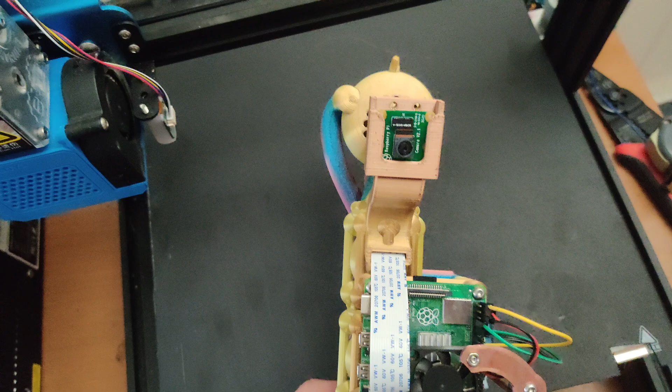Hey, do you want to make this sweet eyeball on a stick Octoprint mount? Well, if so, then good news, because I'm going to show you how.

And if not, then I don't even know why you're here. I mean, did you not read the title to the video? This one's totally on you, dude.

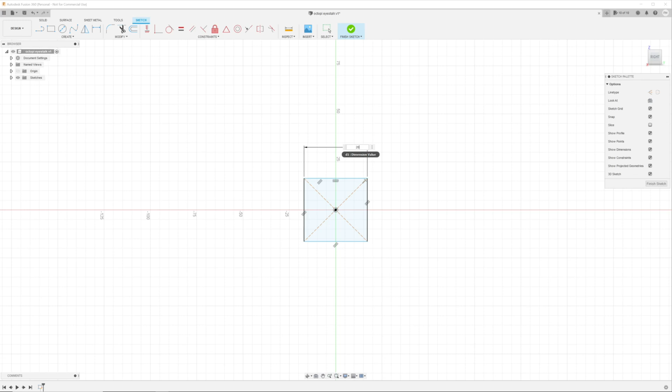First thing we're going to build is the part that clamps onto the printer. Sketch out the cross section of the part of your printer that you're planning to attach this to. I'm planning to mount mine to the top rail of my printer, so I sketched that out in Fusion 360.

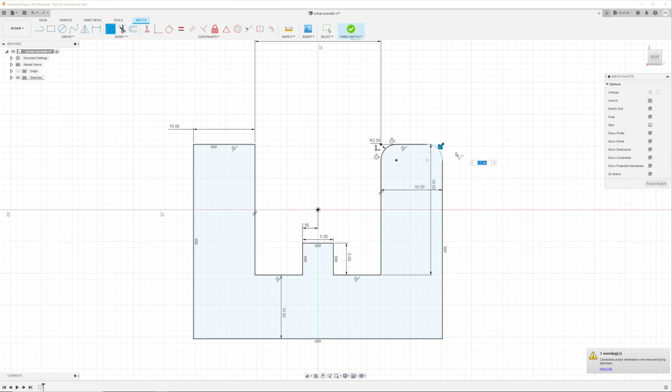Once you got your cross section, sketch a rectangle around 3 of its sides to represent the plastic, and then set the thickness to whatever you're comfortable with. I'm also adding a little tab in the middle just for stability. Round out the edges, and once you're happy with how it looks, extrude it out to whatever width you want.

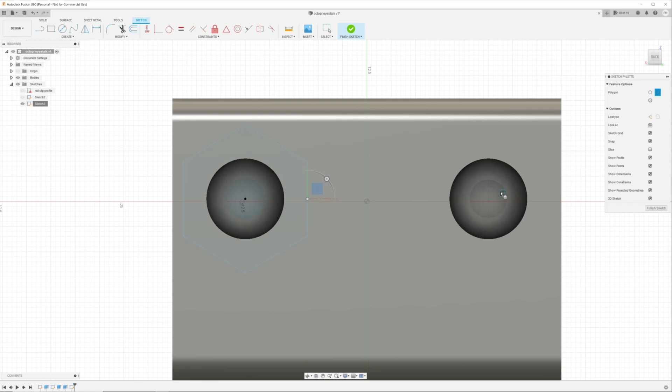Next, we're going to make a way to secure this to the printer. I'm planning to install mine so that it's stretching out forward from the top of my printer, which means that gravity is not going to be on my side for this one. My plan is to use a couple machine screws to keep it in place, so I create a couple of holes for that. I also cut a couple slots to hold hex nuts to give those screws something to grip onto.

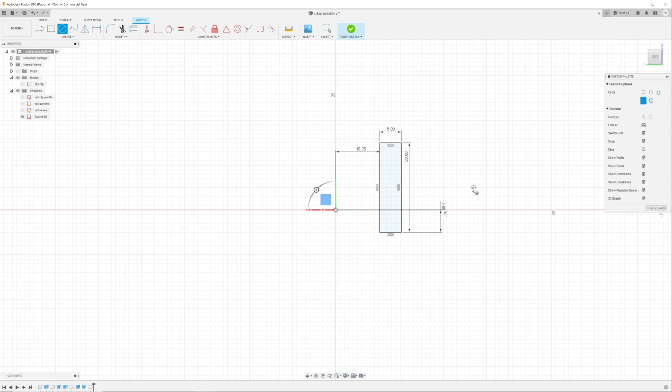Now that we have a way to attach it, it's time to build our piece. I'm envisioning a small cylinder full of tightly packed tubes twisted into a spiral that the rest of the piece will attach to, so we'll start by building that. I begin by sketching a cross-section of the cylinder's lid.

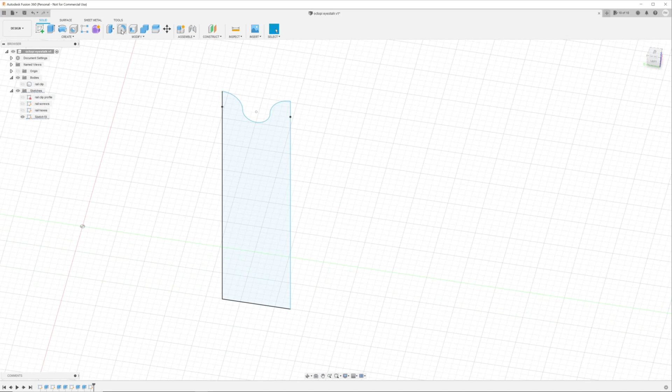I don't really want anything too fancy here, but I do want something with a little bit more detail than just a flat edge. I'm also drawing the cross-section so that it begins on the inside of our rail clip from earlier, which is fine so long as I make that side completely flat. Once I have the shape I want, I revolve it out to make the lid.

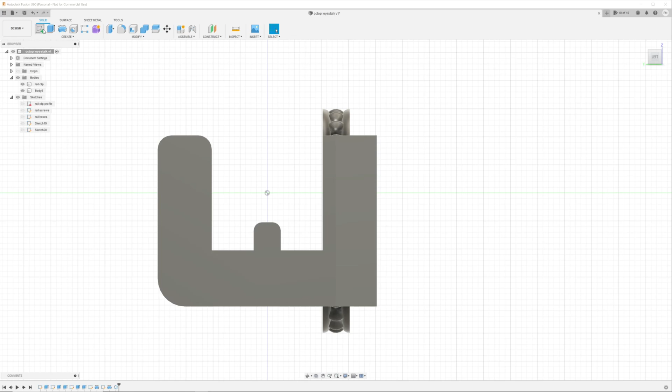I'm happy with the overall shape of the lid, but I'd like to add a little bit more detail to it. I sketch a circle with a line cutting it in half along the edge, and then I revolve that out into an orb. I then take that orb and I form a circular pattern around the lid. Now that I'm happy with how the lid looks, I use the Move/Copy tool to create a copy of it to serve as the opposite lid.

Now that we have our lids, let's make the tubes. I start by sketching out the first tube on the inside of one of the lids. Then I create a circular pattern to copy it all around. Then I use the scissors tool to cut away the intersections, leaving only the outside. Note that you can actually click and drag to cut multiple lines.

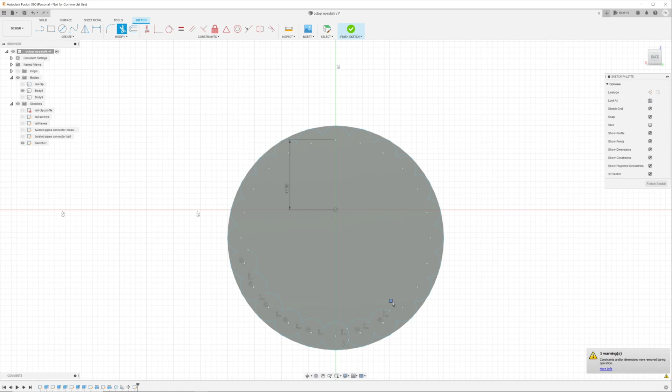I want these twisted into a spiral, so I'm going to create a sweep, which allows me to add a twist. In order to do this, I need to draw a line to represent the path we're going to sweep the shape that we just made along.

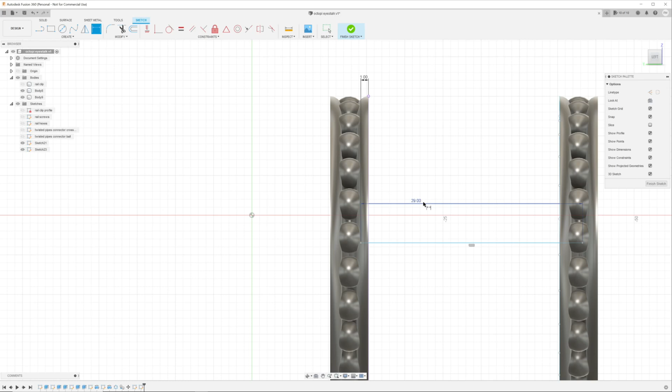This might actually be the stupid way to do it, by the way, because I just picked up the software like a week ago and I'm still figuring it out. So yeah, if I am doing this a stupid way and you know better, then I guess go ahead and dunk on me in the comments or whatever.

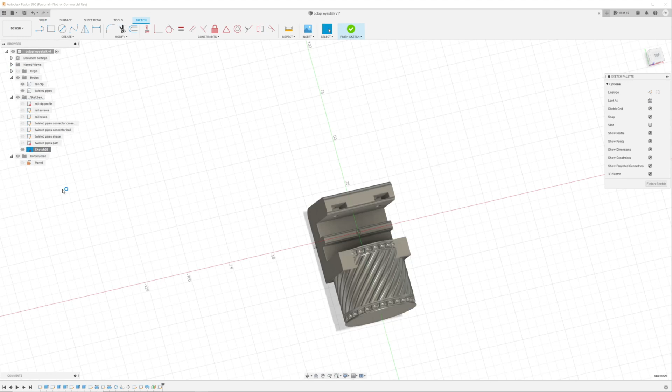Once we have our shape and our path, create the sweep and play around with a twist angle until you're happy. It's going to be easier to build the rest of this piece if we know where the eyeball is, so let's build that real quick. Create a plane a little bit off the ground, and then draw a circle with a line going through it. Revolve it out, and that's going to be the rough shape of our eyeball, though we'll add more detail to it later.

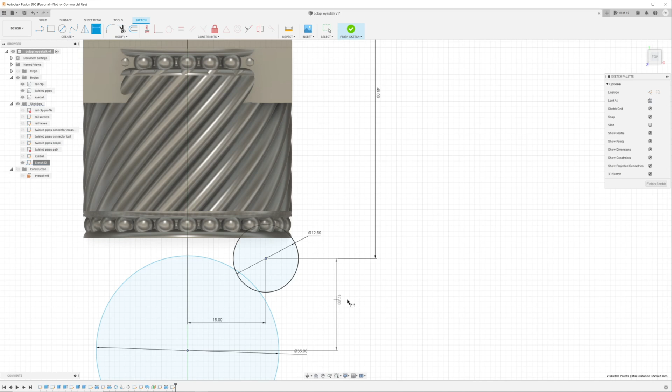I'm picturing a bunch of orb-filled segments connecting to the eyeball, so I create a new sketch and I draw out what I'll need. A couple small orbs that I'll use to create rings at the beginning and the end of this, and a larger orb that's going to go in the middle. I then impale them with lines so I'll be able to revolve them out later. I'm also going to want something to divide up the segments, so I sketch out a cross-section of that while I'm here.

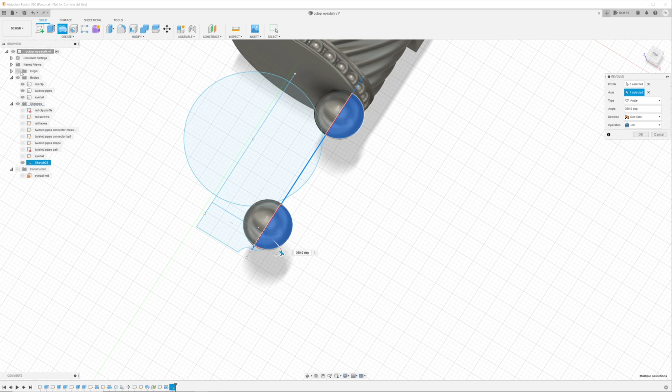I revolve the smaller orbs out first. I want a bar to connect these together, so I create a plane, sketch a circle, and then extrude it forward. I then create a circular pattern to create those rings I was talking about. And then I revolve out the remaining circle to make the big orb that'll go in the middle.

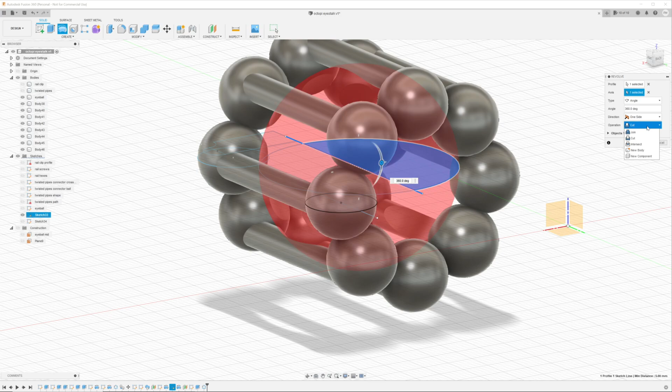And then I revolve out the end cap. Just like before though, it looks a little bit dull, so I do want to add a little bit more detail now. This time I'm going to go with these little circular tab thingies.

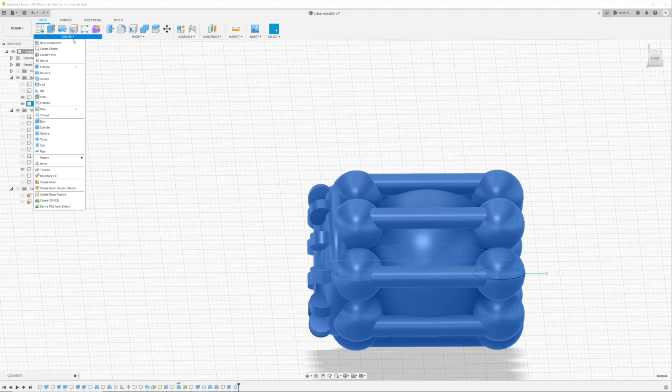Now that we have our segment, I create a rectangular pattern, set the spacing the way I want, and create clones until it's close to, but not quite touching the eyeball. We'll finish connecting those orb segments to the eyeball in a bit, but first I want to take a little detour and build a tube that will wrap around the connectors and plug directly into the eye.

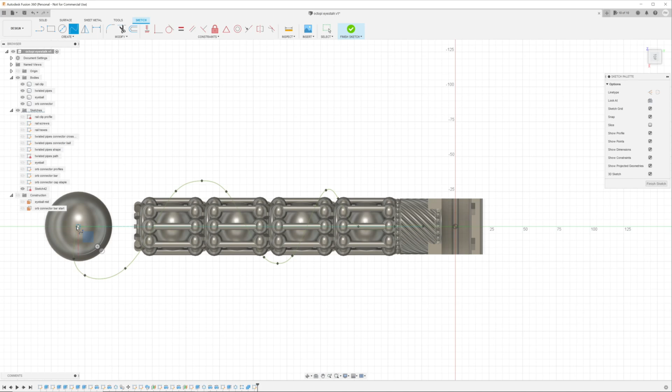I'd start by taking my spline tool and sketching a path that snakes across my piece a couple times. I then tilt the camera and pull the individual points up and down in order to make something that looks loosely like a spiral. I want this to look as if it's been haphazardly wrapped around the piece a few times. I also kind of want to avoid any overhangs that my printer might be unable to handle.

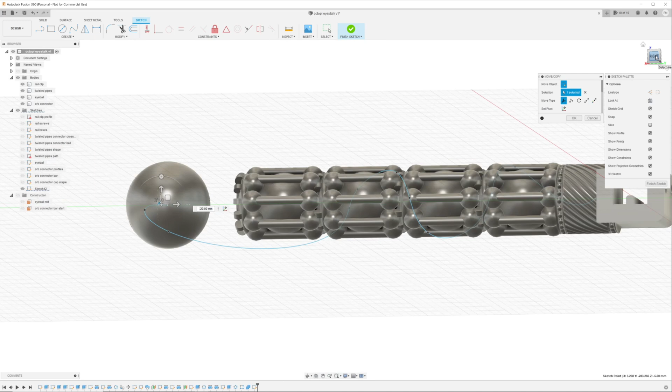Then I sketch a circle to represent the cross-section of the tube, and then I sweep the whole thing out. Mine didn't work the first time because I had a bend that was a little too tight, but after tweaking it a bit, it eventually did.

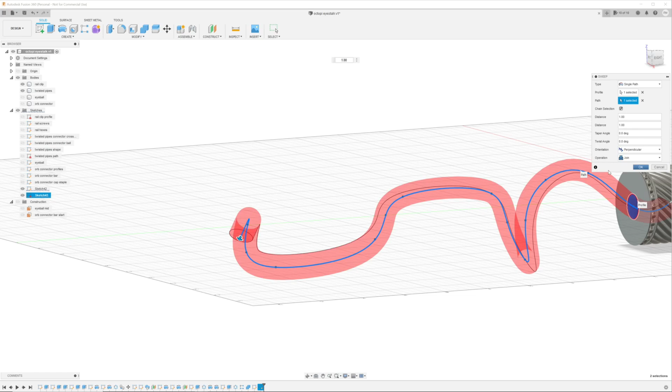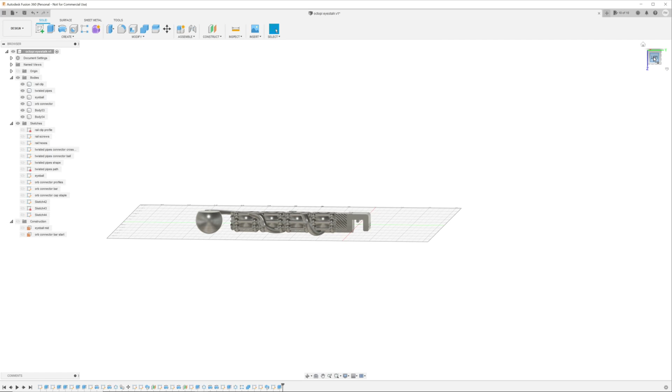Once this tube exists, I make a few adjustments just to prevent any problems I might have when printing it. I'm mostly concerned with parts where it's going up or down. When it does that, I want to make sure that it's doing it very quickly without a bunch of horizontal movement. I slice away the bottom of this just to see how it's going to look when it's printed, and then I make a few more adjustments based on that.

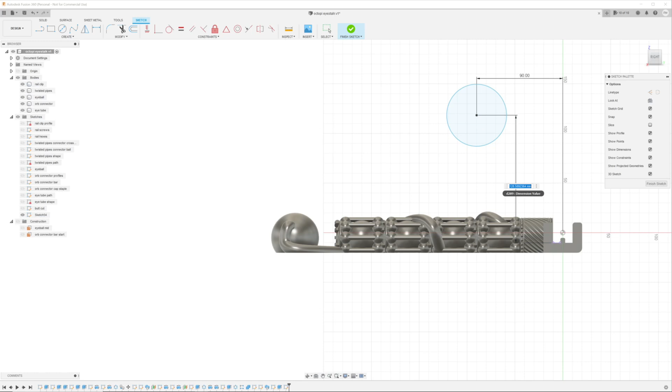Alright, so now I want to connect the eyeball to the stick with a hook, but first I have to figure out which way the eye is looking, as that's going to influence the angle that I impale it through. To do that, I take some measurements of my printer in real life to find out how far away the center of my print bed is from where I'm going to attach this, and then I sketch a circle in Fusion at that location. Once I have my target in the software, I draw a line connecting it to the eyeball, and this is going to be the angle that I want the eye facing.

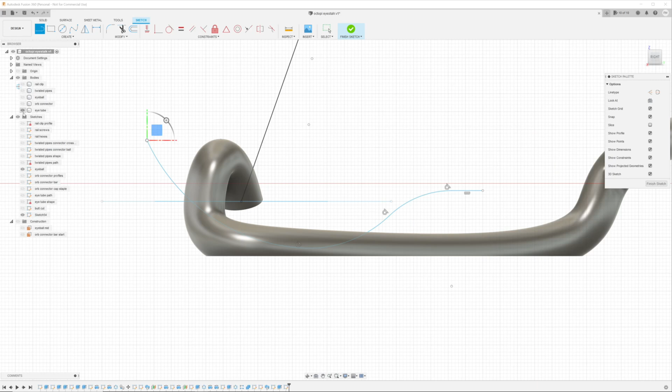Now that I know which way the eye is looking, I sketch a path the hook will take so that it goes in roughly perpendicular. Next, I sketch out a polygon for my cross section. I'm planning to twist this into a spiral, so I want something with edges so that it'll show the twist. Now that we have our shape and our path, we create the sweep and play with the twist and the taper angles until it looks right.

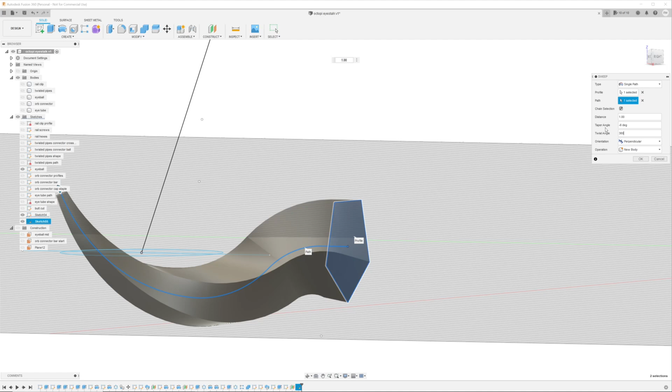I've been calling this thing an eyeball, but so far it's just a blank sphere. Let's add some detail to it. We'll start by creating a plane along a path and then using the line of sight we created earlier as the path and placing the plane just a little bit off the eyeball.

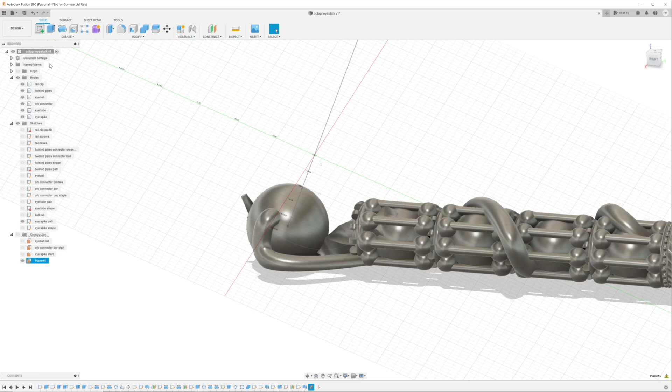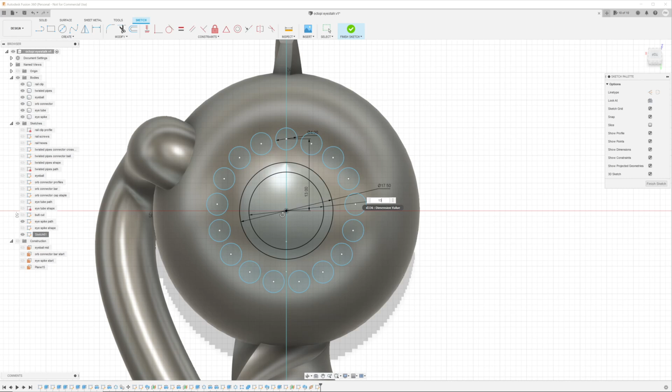Now that we have our plane, let's define our pupil. I'm envisioning a ring of round holes for the outside, so I sketch that. I also want a ring inside of those holes, so I sketch that as well. Finally, I sketch a pentagon in the middle and extrude the whole thing slightly into the eyeball to create the pupil.

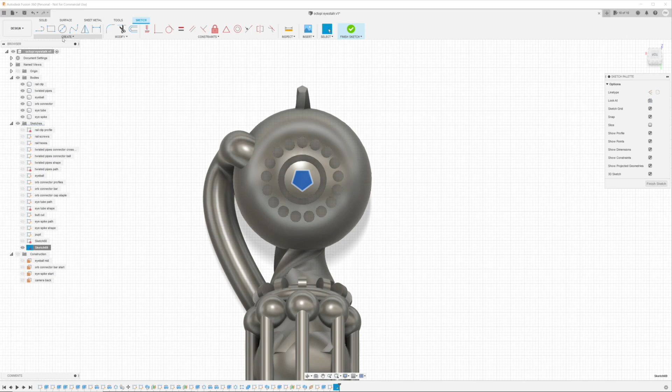Now it's time to build our camera mount. I start by sketching out the back of it on the same plane that I used to draw the pupil. Now we're going to sketch a square inside the eyeball itself on the plane that was created when we extruded the pupil into it. And now we're just going to use that square to create a sweep using the line of sight that we created earlier, but we're going to scale it back so it doesn't quite reach the camera mount. We're also going to give it a pretty heavy twist.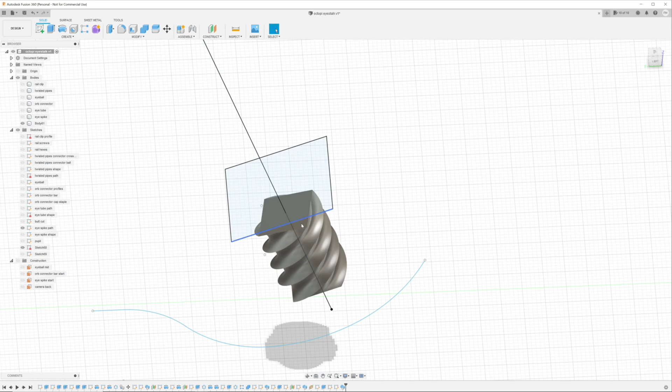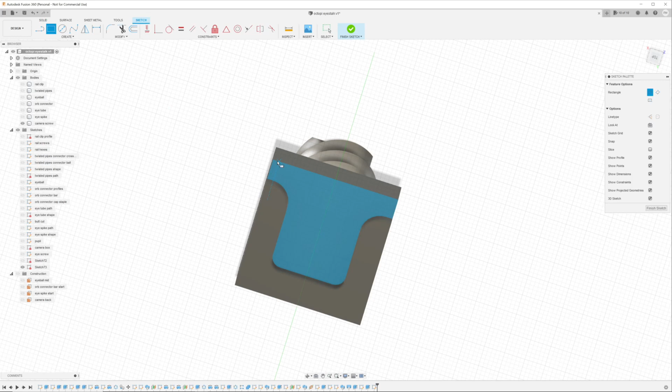And now we're just going to connect the top of the sweep that we just made to the square representing the camera box with a loft. Alright, so now we're going to make a place for the camera itself to live. Let's begin by sketching out an opening on the front of the camera box to let the lens through, and then once we're happy with it, we'll just extrude it slightly into the box. Then we're going to cut a square with the actual dimensions of the camera to make the slot that the camera itself will go into.

And finally, I'm going to punch a couple holes in the top, and what I'm doing here is just giving myself a lazy way to secure the camera in place. So if the camera is slipping around on me, I can just grab a piece of PLA filament and kind of jam it in there, and that should hold it.

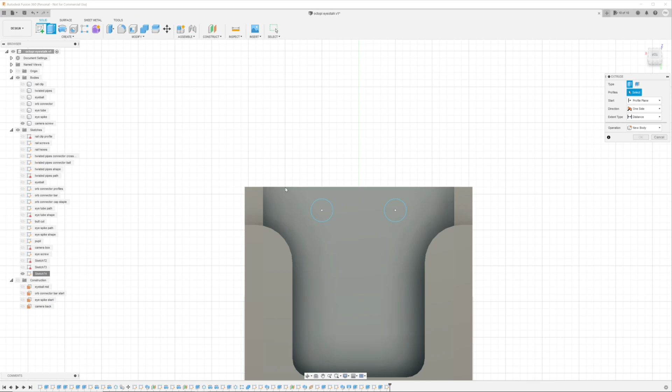Next, I want to build a little channel for the ribbon cable. You don't technically need to do this, and it would actually be a lot easier to just cut a hole in the bottom of the camera box, if I'm honest. And in many ways, this channel is actually going to make things more difficult, as you're going to need to get the cable through the channel, which might even require a longer cable.

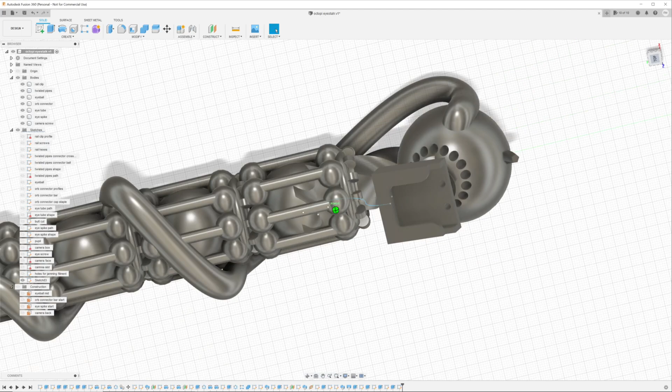But the advantage of creating this channel is that it gives you an opportunity to actually shame the ribbon cable. Ribbon cables, by the way, are huge pieces of garbage, you know. Most cables can actually bend in any direction that they want, but not ribbon cables. I think they're too good for that, so they won't bend on an entire axis for just like no good reason. And I refuse to respect that.

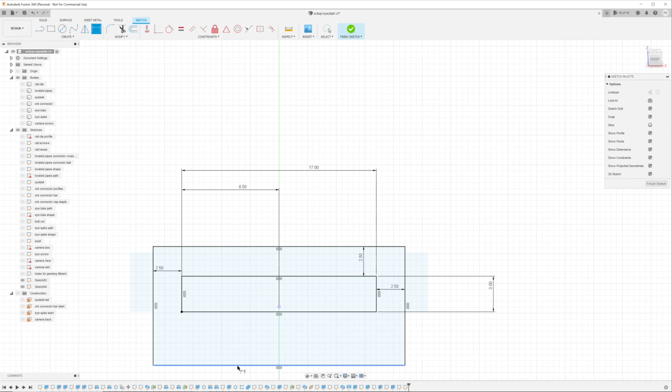So by building a plastic tube around the cable, I'm essentially sending it the message that I am ashamed of it and that I want it hidden from view because of just how worthless it is. What's more, I am going to have some other cables installed here too, and I want them to see that and just realize that there are consequences. And if they decide that there are certain directions that they don't want to bend, I can always shame them as well. So that's why I'm doing this.

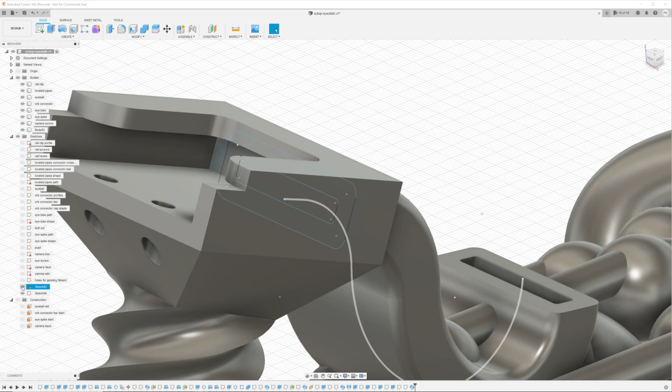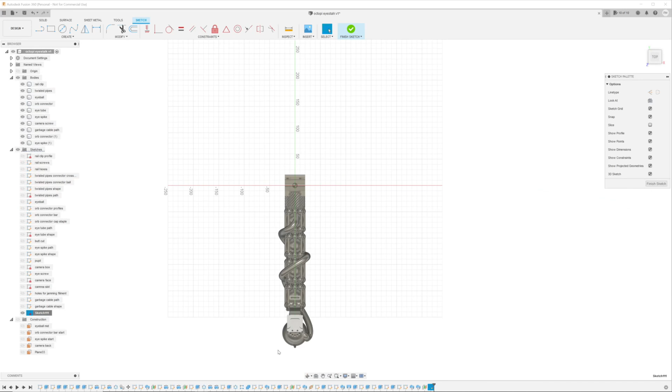Now we'll build a mount for the Raspberry Pi. Let's start by creating a plane just slightly above the model. Then we're going to sketch out the top left screw hole. Now on the Raspberry Pi 4, this hole is pretty close to centered right above the edge of the ribbon cable input for the camera, so I'm going to sketch out my hole right above the ribbon cable output. This wouldn't normally be a concern as most cables freely bend in all directions, but in this situation we're dealing with a real worthless piece of trash cable, so it is what it is, I guess.

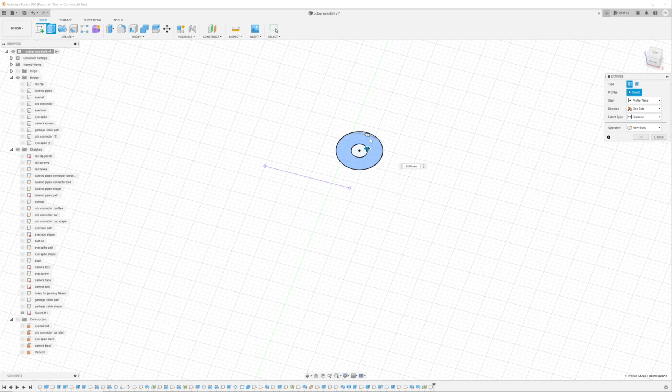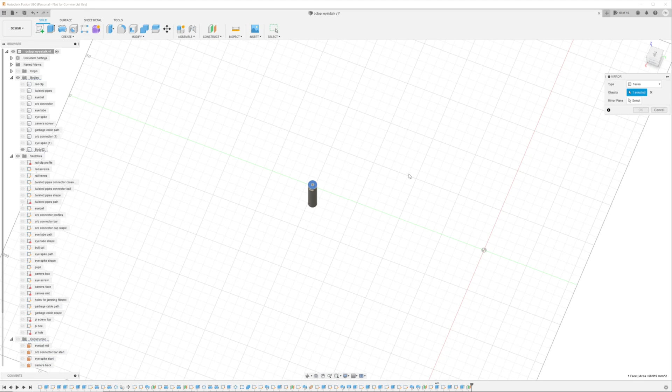Once I have my first screw hole sketched out, I extrude it out, then create a slot for a hex nut, and then extrude the rest of it all the way down to the ground. Now that we have the top left screw hole, we can create the top right just by mirroring the one we just created. Now I want to connect the two screw holes, so I sketch some random shapes and just extrude them straight over. Once I'm happy with what I have, I make a copy and drag it to create the bottom screws. On the Pi 4, these are 58 millimeters down.

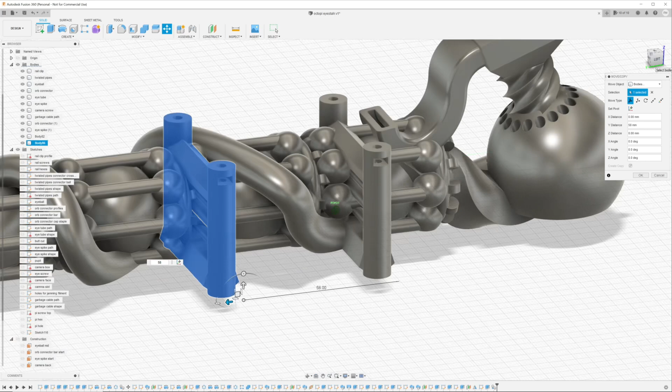I want to clean up the screw holes real quick as they're intersecting a bunch of stuff, so I make some copies of the original screw holes and I just extrude them all the way down. I then make two more extrusions in order to create a single layer of plastic that's right above the hexagon, and that's really just to make it a little bit easier to print, and then I'll just poke through that when it's actually done.

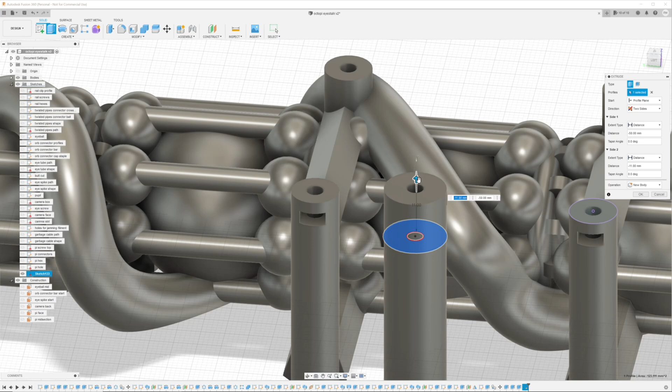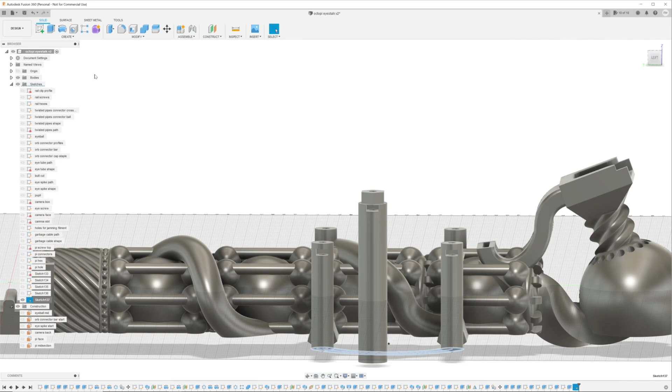I have a tiny fan that I want to mount above the Pi, so I create a peg to hold it. This is really just a hexagon with a screw hole in it positioned about 35 millimeters below the top screws. And then I just make a quick arc slot to join this to the rest of the piece. Now, in hindsight, I probably should have joined it a little bit more substantially as it did come out a little flimsy once it was printed. But, I mean, whatever, it works, right? Now that I have a place to mount it, I'm going to build a simple bracket for the fan so that I can screw it onto the piece.

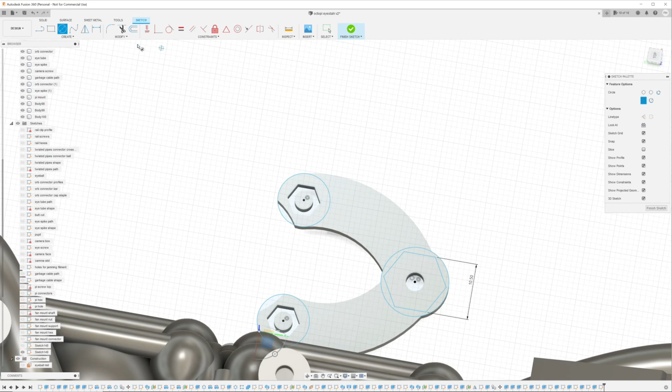I want my Octoprint installation to be able to control a single channel relay, which will in turn control an LED light strip, so I sketch out something on the back of the piece real quick just to give myself a place to mount that relay.

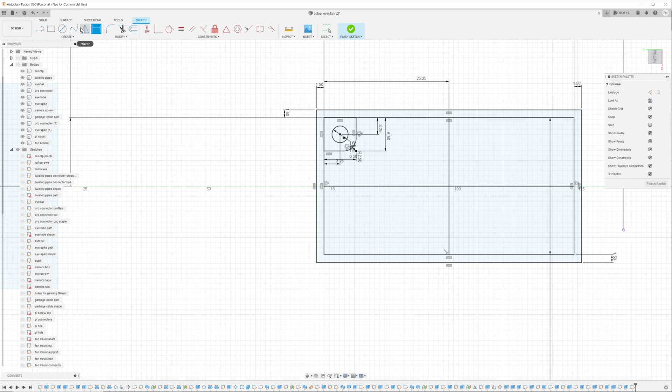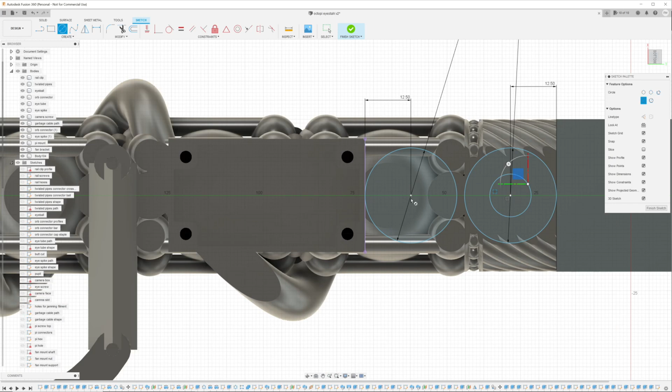And the last thing I want to do is just give myself a way to manage the USB cables and lighting cables that I'm going to have running to the Pi. I want something open that kind of shows the cables off, as I feel like that works with the theme that I'm going for here. And also it'll really drive home the point that I'm someone who appreciates visible cables, so if I have to hide a cable, that means that cable was a real piece of garbage and should feel pretty terrible about that. This pair of rings will let me pull the cables through it and keep them in place while announcing to the world that some cables are beautiful and therefore by extension some cables are just ugly trash.

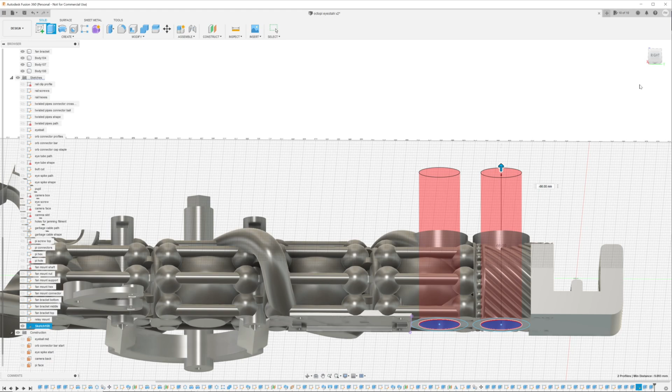Finally, I cut off anything that is protruding below ground level and send this to the printer. And here's the result mounted in place.